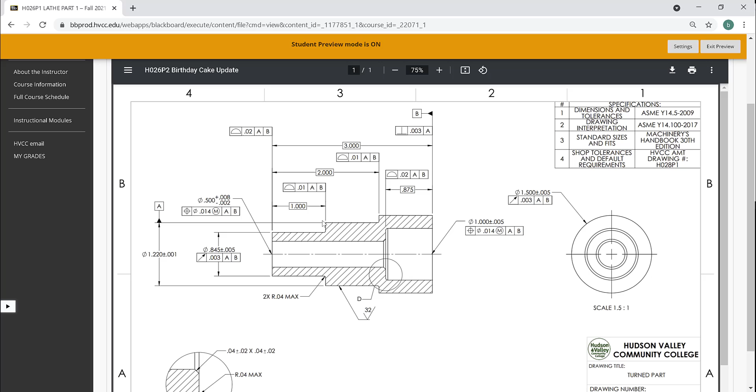Okay, so get back in here and let's take a look at some of the support content, and let's start with the lathe operator handout. Very similar to the mill, except obviously it's for the lathe.

It gets into the index, then types of lathes: ST series, TL series, DS series for dual spindle, chucker lathes, etc. Types of turrets - we have a VDI turret here on our turning center. The other type we have is the 8-station automatic turret, which is only on our CL, or chucker, lathe.

Other than that, we just have the regular dovetail, Aloris style tool posts that you're used to from the manual shop. We'll cover the VDI turret at a later time when we're going to be running that machine, because it's a little different - it has an automatic tool presetter, things like that. So a lot of this stuff we're not going to worry about right now.

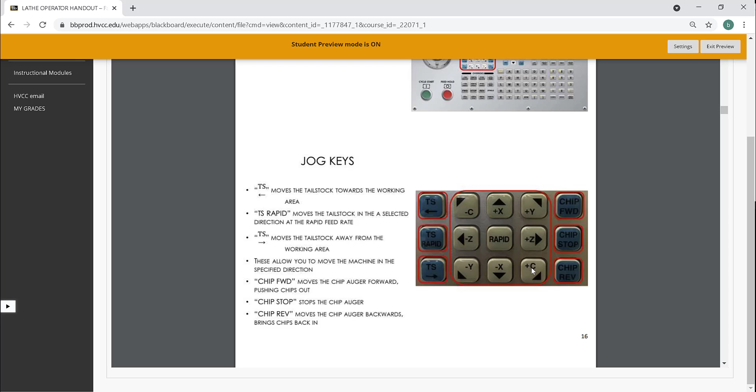It goes over the pendant. It's very similar to the mill, but it has different buttons applicable to the lathe. At least on the machines we're going to run first, there's only 2 axes. All the locations are about the same. The tool offsets are a little different, how you set tools is a little different - we'll talk about that. Overrides are pretty much the same, jogs a little different, same layout but different values. Mode keys are pretty much the same, loading a program is going to be the same. Not a whole lot of differences here that I'm really seeing - it's just more applicable to lathe, what you're going to want to see when running a lathe.

Okay, make sure you keep this, make sure you print it - very important at the machine. It'll get you out of a bind if you're stuck and don't know where something is, in case I'm not available. Position, again, is going to be X and Z. Could have a C axis, could have a Y axis, depending on what machine you're on.

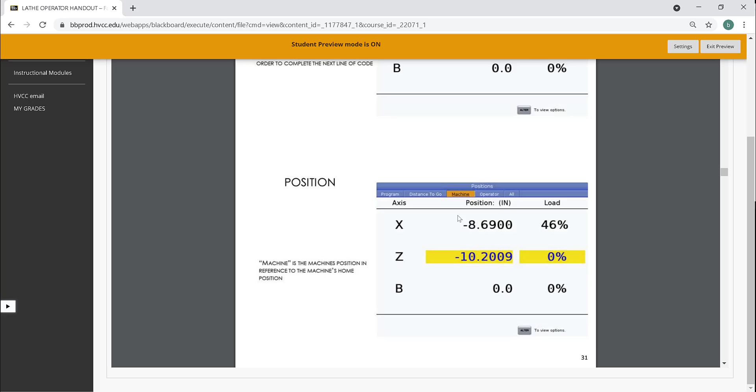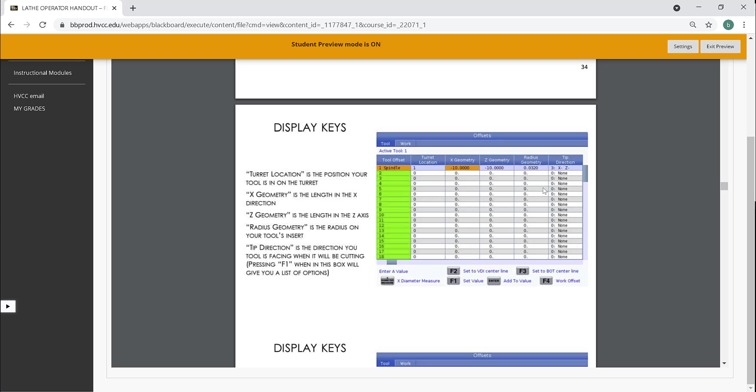Current commands is similar, but that's really about it that I see. Again, you're going to see some differences right underneath the F1 buttons - those are for setting up tools. We'll talk about that in the shop.

Okay, the help menu is pretty much the same. Again, instead of tool length offset and work offset like on the mill, this is Z face measure and X diameter measure - a little different. Types of tooling it gets into: stick tooling, parting, internal work, face turning. These are specific - we're going to use more of the regular stick tooling for now.

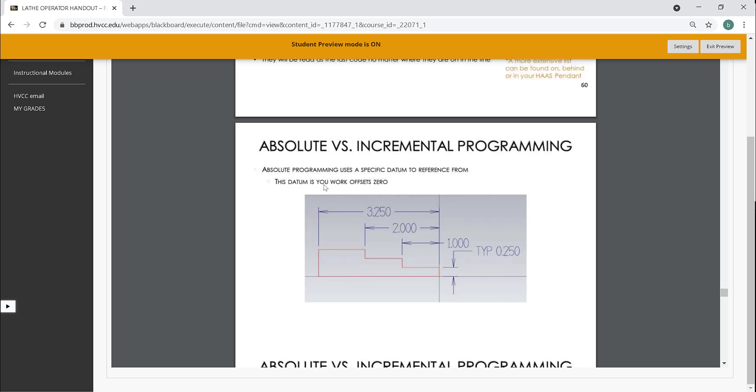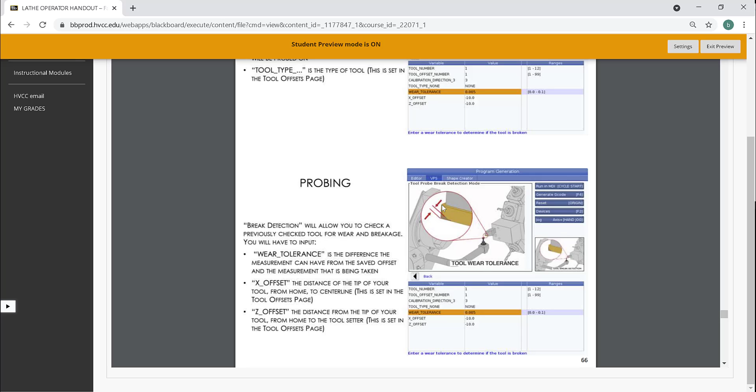And then programming, some of the basics. This goes into a little different changes versus the mill manual - absolutes versus incremental programming, which I'm not going to revisit too much. Then it gets into the VPS, which we are not going to use right now. The VPS for probing is useful when we get to that machine - that's one machine in the shop that has that. We will cover it.

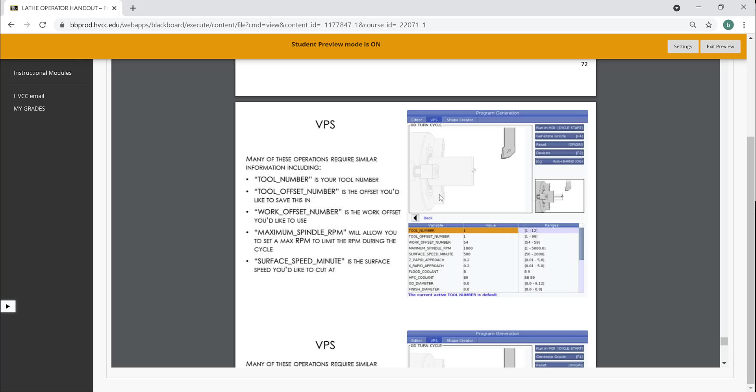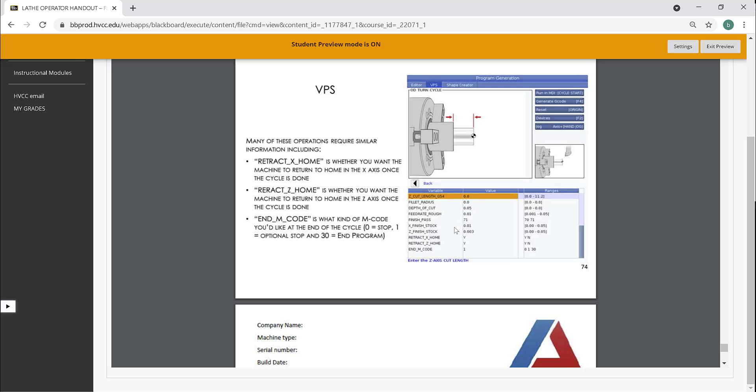The shape creator and other onboard programming, the VPS, we are not going to cover till later on. The reason is that this is going to be HAAS specific, and if there's not a HAAS machine where you go to work, then any skills on this could be a problem. So I'm going to try to teach you ways that are more universal so that you are ready to run almost any machine tool for the most part. We'll get into VPS at a later time after we cover the more universal basics.

Machine maintenance, 15 easy steps for preventative maintenance, very important. Then resources, you can click on this in the link. Okay, so that's the overview of this lathe operator handout.

The lathe programming workbook we'll have open, and what we'll do is go to the whiteboard and talk about some of the basics in programming, some of the basics on the lathe, touching off tools, things like that. You'll see there is a difference in the program format, and that sometimes there's less code, less things you have to worry about.

I find that lathe programming does throw people for a loop because a lot of lathes run on diameter for all their X offsets. And even when you're setting tools off, you see numbers that don't make sense because you're working on diameter in the X.

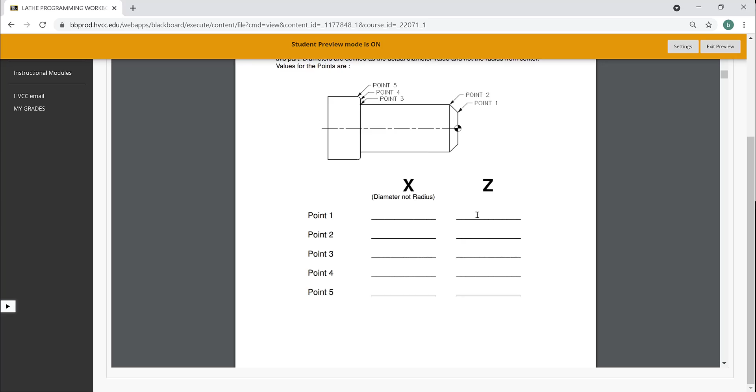So let's take a break here. Go ahead and take a quick look at the workbook, and then I'll come back on the whiteboard and we can discuss some of the basics here.

Alright, so we're on page 5 in the workbook, and I'm taking a look at the setup they have here. You'll see the chuck, the part, and the axes. Essentially, all HAAS lathes, whether the tool comes from this side or this side, you always program it like it's coming from this quadrant to turn a diameter, okay? So that's the way we're going to program.

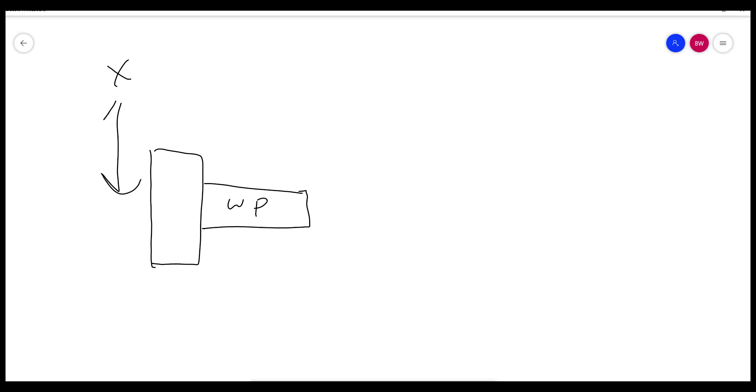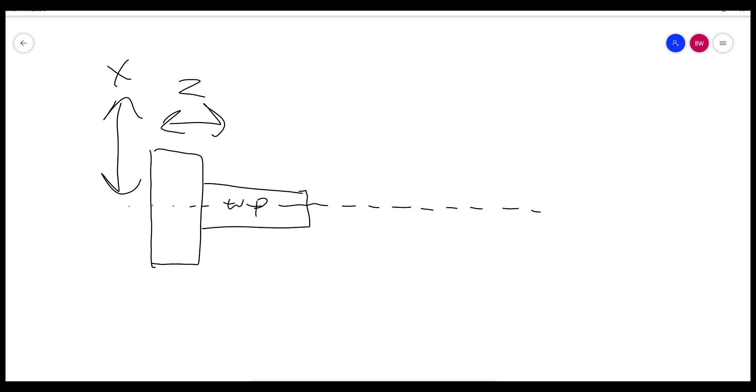Some important things here. The lathe, if this is our chuck, and this is our workpiece, the work offsets work a little bit differently. The X is this direction, the Z is this direction. The work offset, usually you do not need anything in the X because the X is center, 0 is center of the spindle. So X is 0.

In work offset, let's say G54, the Z, normally when using work offsets, would be set to a preset location, let's say the chuck face. Because when using the lathe, if you're not using a presetter, but a tool touch-off probe, a lot of times most people will touch off all of the Z's to here from home.

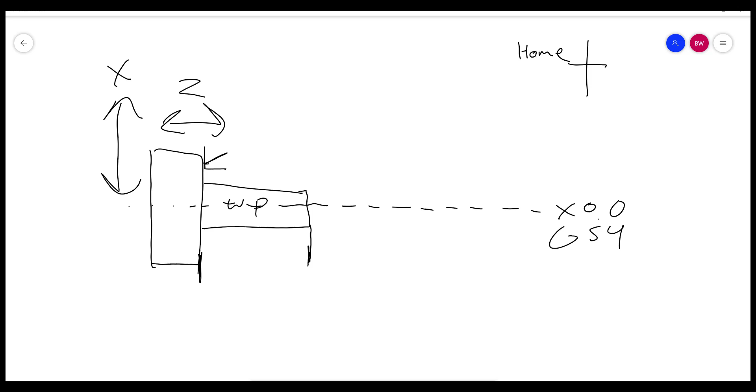And then all of the diameters will touch off a known diameter, and compensate from that diameter to the center, or X0, the center of the spindle.

So some people will touch off the part, take a little cut, measure the diameter, use what's called X diameter measure, and then you'll end up typing in whatever diameter that is, and that'll automatically calculate the swing, or the diameter that the tool will cut when home.

So if the machine is home and the tool is actually sticking out, let's say the tool looks like this, something like that, looks like a hockey stick, but whatever. This diameter, when the machine is home, that this cuts right now, okay, is what's going to be stored in the controller for the X offset.

So you'll see numbers that are 13 inches, 10 inches, whatever it might be. That is because it's checking, it's a diameter right here.

So that matters for all OD turning tools. Now for ID turning tools, it'd be a little different. You would have to have a hole existing and touch off the ID and do X diameter measure to the ID. We'll cover that in a later video.

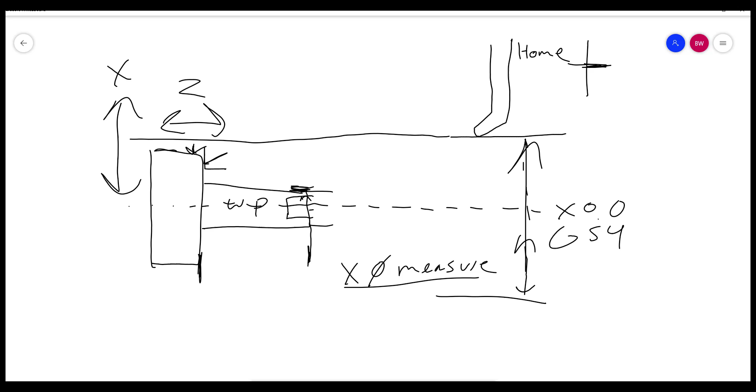Now, like option 1 on the milling machine, you can touch off all the tools. Let me erase some of this a minute. You can touch off all of the tools to the face of the workpiece. Okay? So if this is our workpiece, all of the tools could go from here. All right? Here's again the problem with this. If the workpiece length changes, you have to touch off all the Z's again, or know that distance.

If you touch all the Z's off of the chuck, and then with a taught tool, come off and set your G54 to the face of part, that way your tools are taught the entire time. But it's up to you. The tools will most likely be re-zeroed when you enter the lab. If you're using one workpiece, you're not going to be running others. Then it probably doesn't make a difference.

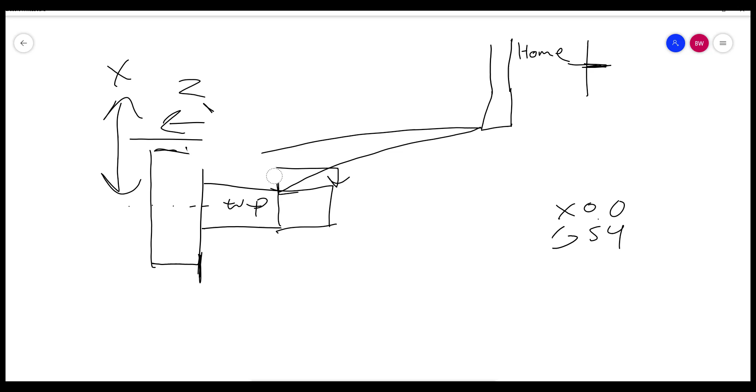You are going to be fine to use the option 1 equivalent on the lathe, which would be to just touch off the tools to the part. Okay? And sometimes if you're doing multiple workpieces, you'll set up a stop from here to here so you can bring the stock out of the chuck to the same spot every time to run another part. So that's up to you.

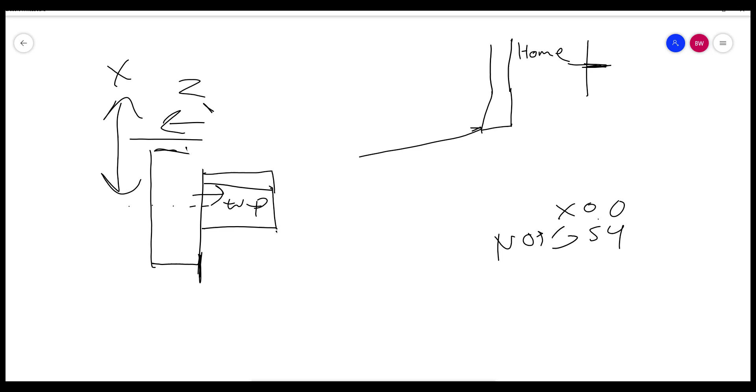So again, just to reiterate, you could have no G54 offsets and touch off every single tool to the workpiece on X equals diameter and the Z face. Okay? That would be equivalent to option 1 on the milling machine. You change the length of the part, you got to touch off all the tools again. If you do it the other way, and this is a good way if it's your machine, you know it's going to be good. Nobody else is messing with it.

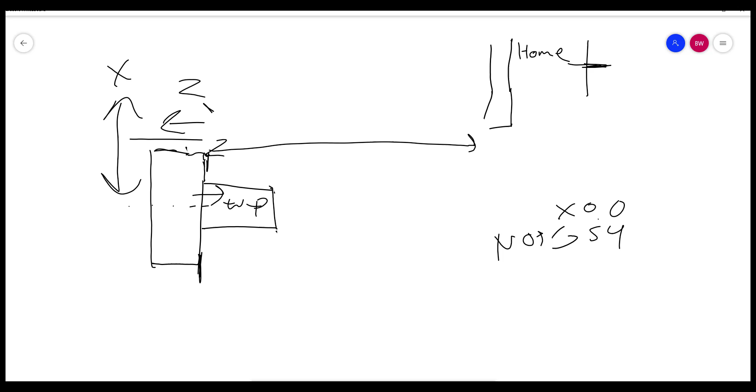If you touch off the tools, especially in the Z, really only the Z, if you touch off all the tools to this face, so this distance, this would be a tool offset. Okay? Then have a G54 offset using this touched tool from here to here. Now the tools are touched, and then all you have to do is change one offset to change, let's say, 10 tools. So it's much faster that way. It's very similar to using the 1, 2, 3 block on the milling machine. Okay? So just remember that.

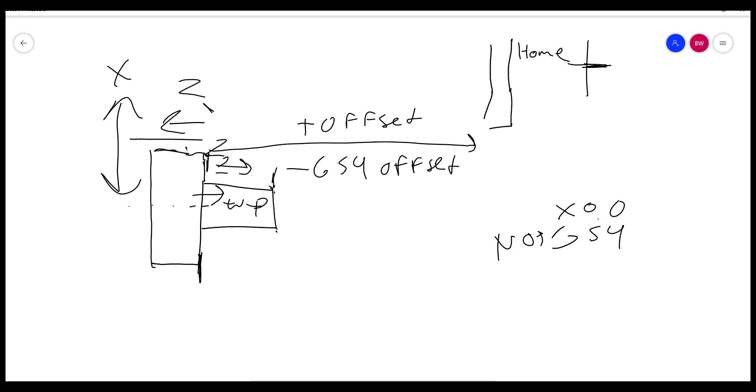So let's look at a couple other things when it comes to this. Let's go through the book here. We're getting incremental and absolute, very similar. On page 8, it gets into a very important thing. Let me clear this. In page 8, it gets into point locations. So the Z is not a big deal. Actually it's 7 and 8. You'll see the part on page 7 and then a little chart on page 8. And then there's also information on page 9 that gets into corner radius locations, and that's really good too, but we'll focus on that later.

Take a look on page 7. You'll see the workpiece, and it gives out diameters of 1.5, 2.0, and then some Z distances. Let me pan over to this. I'll bring this over here, and take a look on this example. Point 1, 2, 3, 4, 5. Okay, diameter, not radius. So one thing to take into account here is that on a chamfer, the diameter created at point 1 is what you need to enter in for point 1.

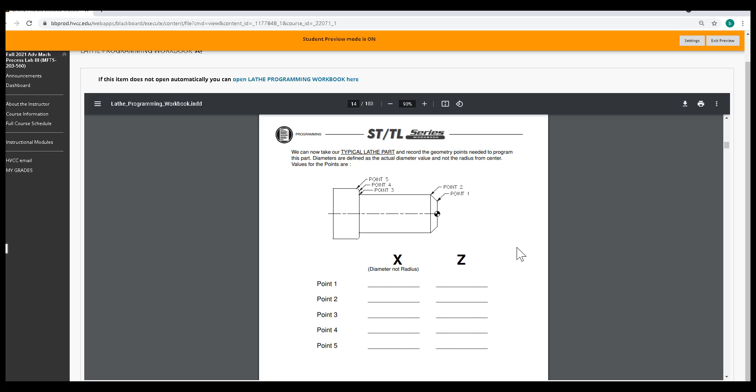So let's go up on the top here. This chamfer is 1/4 inch by 45 degrees. So it's not going to be 1.5 minus 1/4 inch. It's got to be 1/4 inch times 2. It's 45 degrees. Each side of that triangle is the same. So it's going to be 1 inch. Okay? So when you get down into this chart, point 1 is 1 inch on the X. The Z is 0. Point 2, the X is 1.5. The Z would be negative 1/4 inch.

Okay? Now you got to go down to here. If you get to point 3, the X is going to be the same, 1.5. The Z is going to be minus 3 inches.

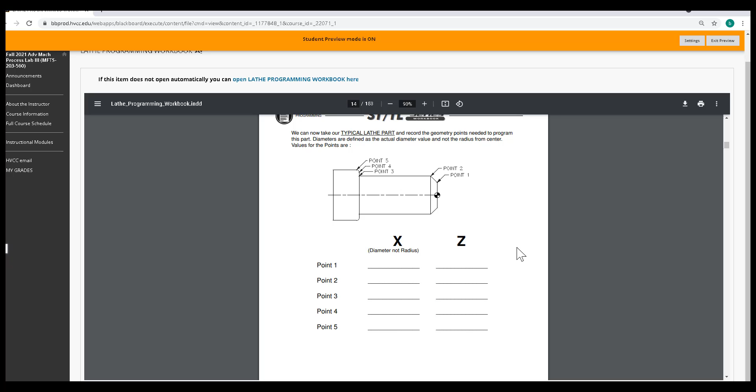When you get to the radius, point 4 is when it gets tricky, because now you have a similar situation we had with the chamfer. You have to subtract 0.2 from 2 inches, or 1.8. And what's really important about that is that's going to be the diameter before the radius. So for point 4, it's going to be 1.8 and then Z minus 3.0.

Then we go up to the next point, which is point 5, and that's going to be X 2.0 Z minus 3.1. So work through that, take a look at it. Just remember that all the X moves are on diameter, every single one.

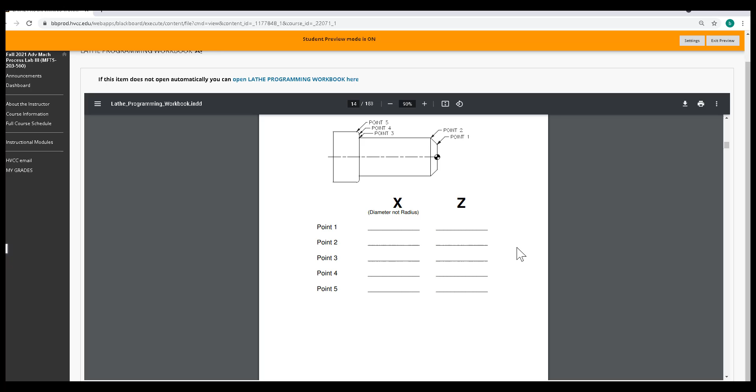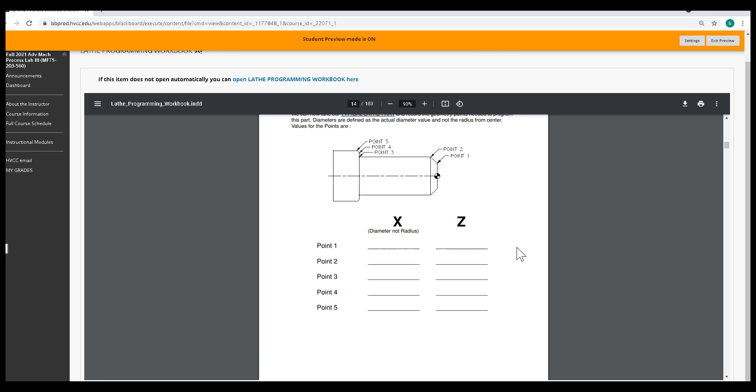We get to the next example. You can work through this if you want now. It doesn't really make a big difference. We did go over a small radius here, but I recommend you work with that. When we get into circular interpolation, we'll get into more details on this.

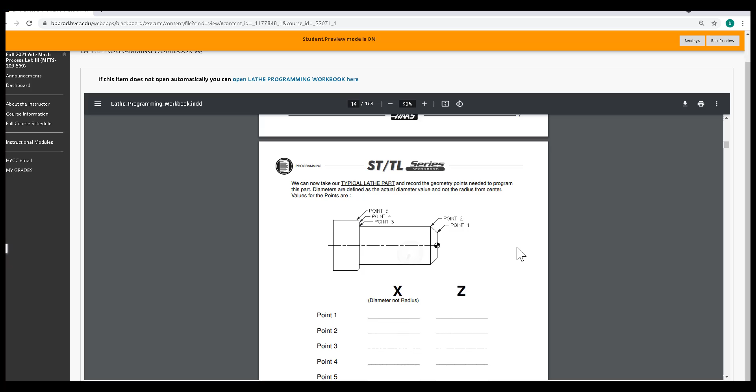So that's fine. And again, it goes through in parentheses. You don't need it again. We went through that with some of these, going from point 2 to point 3. From point 2 to point 3, you don't need another X value because it's already there. It's not going to change. Then we get into programming with codes.

The program format does change, but let's pause here. I recommend you work through these. If you're having an issue, make sure you email me or see me in lab. We'll pause here, let you catch up, and we'll continue.

All right, so we're going to continue taking a look at some other program structure things when it comes to lathe, some of the differences. I'm on page 27 in the workbook, so let's skip ahead and get right into this. My concept here is I do this so that we practice what we need in process without having to really go through the workbook. We will cite it as needed, and I find that really helps back up what you're doing in the lab. So just like milling, we do need to start and end our CNC programs with a % sign.

And you still have the O number, so O and then 20, 21, or whatever you want. Let me clean that up a little bit. Then we get into our first line of code, and you're going to see a lathe, especially from the examples in the text, a little more broken up. We will really have our first exercise with mandatory line numbers when we start using our rough turning subroutine. So let's cover that now.

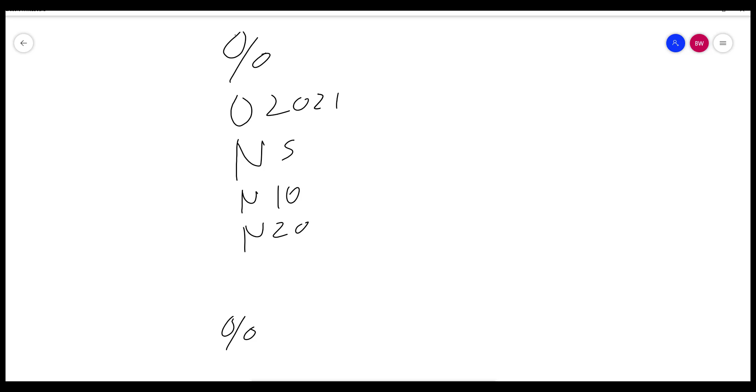I don't remember if that was in the milling, but on some programs you will see an N, like N5, N10, N20, whatever. Those are just line numbers. They are great for editing, but you do not need them necessarily. A lot of these simple programs we're going to be working on, especially on the mill, until we get into subprograms, you don't need them. They are handy. You do need them when turning a little bit. You'll see I use them only as needed because there's extra things you have to type in.

Instead of putting like N1.1, if you need to add it after line N5, you can add N6, N7, N8 easily at the controller. So for right now, we're going to skip that, but I just wanted to mention what the line numbers are. We're going to end up calling up tool 1, and it's going to be T101.

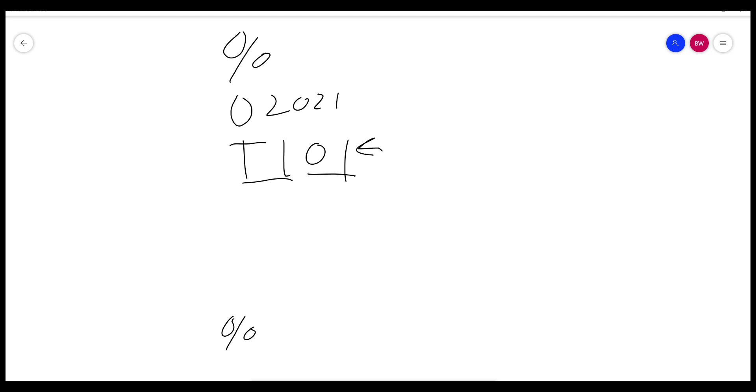The key here with T101 is on the lathe, you need both axes when turning anyway, so you need the X and the Z offset. So you just call up tool 1 using offset 1. And this gets interesting because sometimes you could put tool 1 offset 3, offset 4. This offset takes care of Z and X equally. So that's different. It's no T1 M6, it's just T101.

Now, your next line is going to be something to do with spindle speed. Let's get the spindle turning when the turret's away, when the tool's away, and get the part turning. So the first line, and this order is specific, you really need to have this G50 on first, and we're going to call S, let's say 1000.

And that limits the spindle, or spindle max speed, at 1000 RPM. Because on the lathe, we're going to have what's called constant surface speed. So when turning, especially when facing, you're going to get the same feed rate the whole time, or the same chip load. So as the part gets smaller, the surface speed will automatically be calculated by the X location, and it'll spool up the RPM to keep the surface footage the same. Okay? So you need this limiter.

Okay? And again, we are on page 27 in the text. If you're following along the text, I did skip the N1 and the G28. I'm not really worried about that for right now. Next, we're going to just turn the spindle on. Okay, like I said, G97 turns the spindle on at a fixed RPM.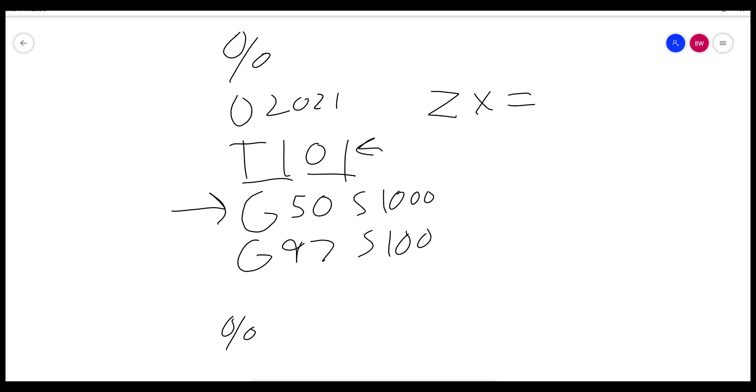G96 turns it on to a constant surface speed, and the interesting thing here is that the S value turns into that constant surface speed, not the RPM. So right now we'll end up putting a G97. Let's say it's S100. Just turn on 100 RPM, get it turning. Okay, and M3. M3 is going to be, if you're looking at the chuck, counterclockwise. It's going to be turning the way to cut correctly.

Usually a lot of these, at least in my experience, you've got to be looking at the back of the machine or from the other side of the chuck, and that would be clockwise, and that's how they derive it. But depending on what machine you're on, especially in live tooling situations, you've got to make sure that thing's spinning the right way before you turn it on, and that can vary by machine, so make sure you double check that.

All right. The next line of code, we're going to have a work offset call out, a rapid line, go to a start position, and then turn the coolant on. I'm just trying to follow along with the text here to keep some sort of continuity. Do you have to do that? No. You could break this up. Do you need the G97 right now? No. You don't necessarily need it. But it is wise to get the spindle turning. You just don't want the thing to spool up to some RPM.

This G54 line here, so it's going to be G54, and you could put that separate if you want to for easy editing. G00, and then you could go to the next line, X, whatever, Z, whatever, and then you could turn coolant on separately if you like, just so it's easier to edit. So the G54 is taken care of, and the offset and what tool is in there is taken care of. The spindle is on.

And then it gets into the constant surface speed, and coincidentally, it does turn on a G71 command, and we'll talk about what that does in a minute. But I think that doing that in the simulator will help. So let's get into the simulator. Let's start getting this code going for our example workpiece, and we'll continue from there. So we'll take a break right now.

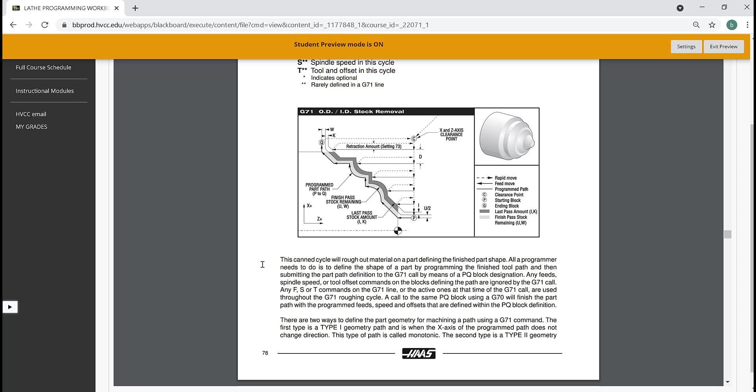Okay, so we're in the simulator. Let's get back to Blackboard quickly. I will give you a page reference right now. We do have to set up the program to face the workpiece and things first, but we will continue on page 78 shortly. So get to that page while we're there. I'll get back into here and take a look at our workpiece.

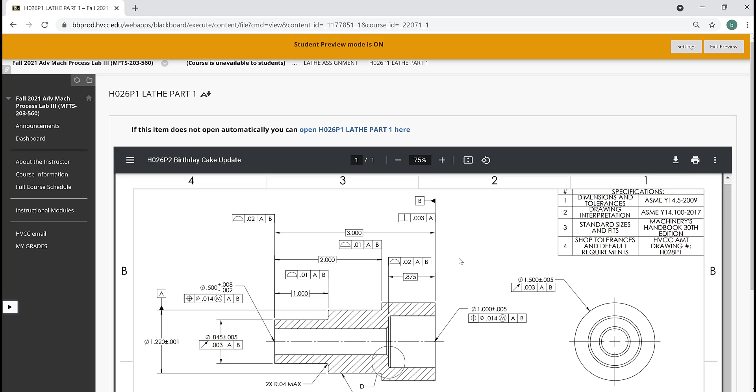All right, so we're going to be working with 2-inch stock for this example. The workpiece max diameter is 1.5, so we do have a little bit of roughing to do. So let's start programming this workpiece. We'll get over into here, and let's start with a % sign. Let's just go T101 and call up tool 1. So we're going to put parentheses over here, tool 1 offset 1, and we can add a comment right below here if we want.

Our O number is obviously needed, O2021, or whatever you like. And then comments are also fine.

Lathe example. So we've got tool 1, offset 1, that's loaded. A couple things you could put here. Even before turning the spindle on, you could add G99, which forces the lathe to inches per rev, which is handy. That's in the text, so take a look at that. That's fine.

There's some codes, G18 forces the XZ plane. They default to that, so I wouldn't really worry about it for right now. We can put G99 in just to be safe. We could do G40, G80, those are things you could cancel, but a lot of modern machines cancel them automatically, or you already did. So I wouldn't really worry about it for right now.

We'll try to get these programs as tight as possible so they're easier to edit. So let's get our spindle turning. That's going to be G97. Let's do S, say it's at 200 RPM. That's fine for now.

But again, before this, you must put your limiter, G50, S, and we're going to limit it to 1000 just to be safe. In parentheses over here, let's put IPR. And right below it, for our limiter, RPM limited to 1000. And then we have our straight RPM callout.

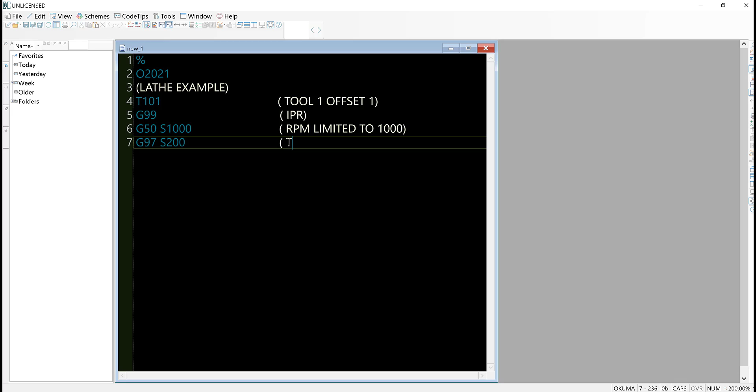So it's going to be turn spindle on to 200 RPM. And we are missing one code here, which is going to be our M3. So now our spindle's running.

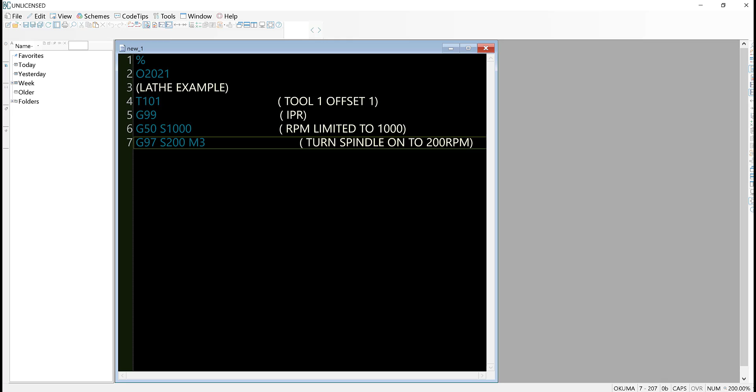Now it's wise to start getting some movement going. We don't want to turn constant surface speed on with G96 until we're close to the workpiece diameter, and where we put this is going to be critical. So I'm going to put my G54. I'm going to keep it separate.

I'm going to end up putting my M8 here. You don't have to, it's probably not necessary. It depends on if there's a delay to your coolant. If there is, you want to put it on a little bit earlier as the machine's moving, but for us it should be pretty instantaneous. We could even put a dwell there, it's not a big deal. But I've run into some machines where a check valve is damaged and it takes a while for the coolant to turn on, so just something to be wary of.

Okay, so we got a work offset. We'll put G54 and G00 just to be safe. And then we'll go to X2.1, Z.1. Our stock is 2 inches in diameter, and we want to be 100 thou away on the face. Not a bad way to go. The other option is it's not critical at this point.

We can go to X2.1 and then separately go to Z.1. The point here is it'll move in the X, then go in the Z. You could do the Z first, then the X. Whatever you need to do to make sure you don't crash into the workpiece. So it's up to you how you want to do that. You've got to watch out for your centers, tail stocks, and things. It's up to you, either way will work.

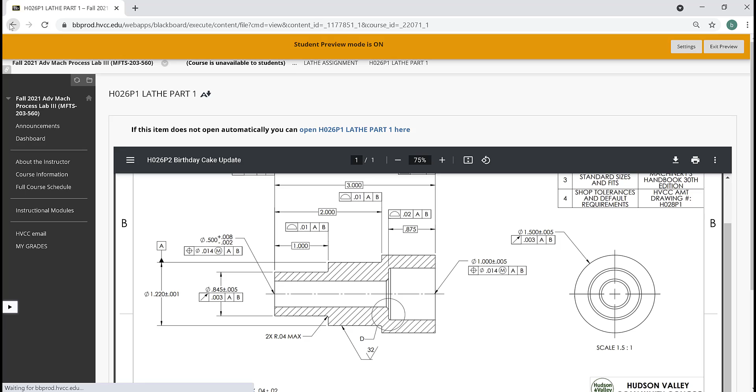Let's take a look here and cite this properly. If we get back into our support content, into our lathe programming handbook, I'll go down and look for this.

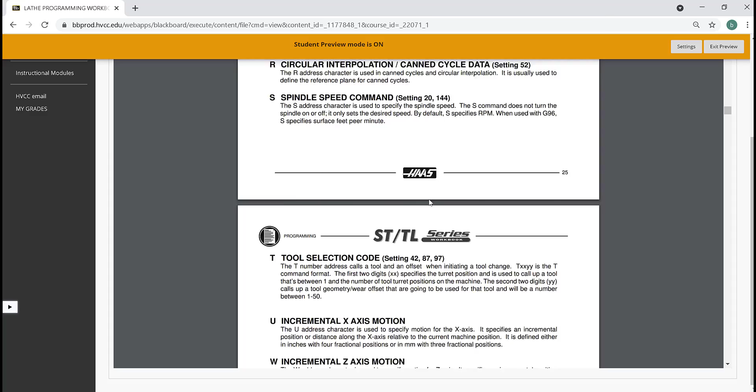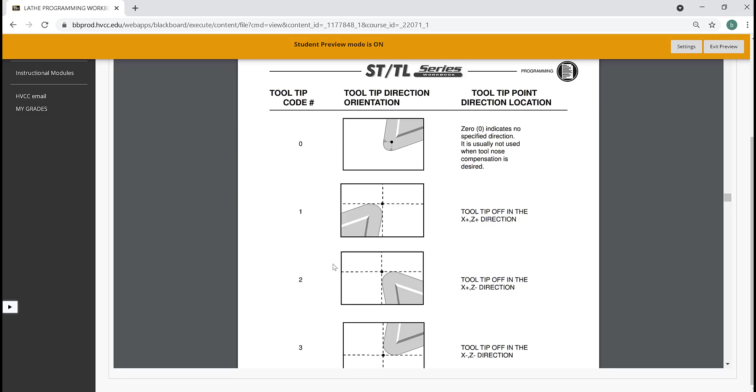G71 is a very useful toolpath, or subroutine. I know the manual goes over tool nose radius compensation first, but our example does not lend itself to cutter comp on the lathe. We'll cover that when we cover cutter comp on the mill, which will be the next module - it's important to cover them at the same time. We are not cutting any chamfers on this workpiece, so it's okay to just ignore it for now.

We'll get back into here, and again, I'm scanning. We start turning page 77, and it goes through the different cycles.

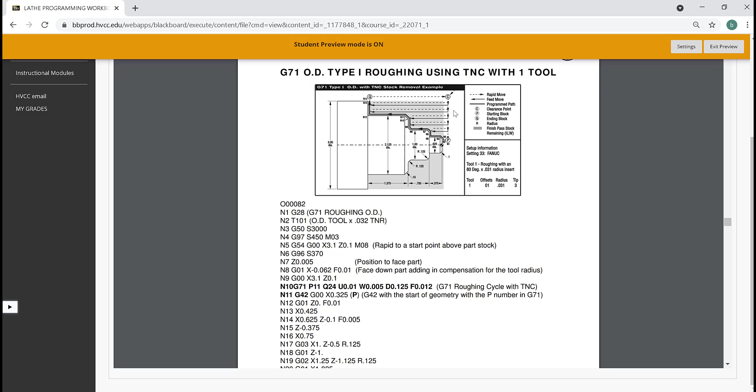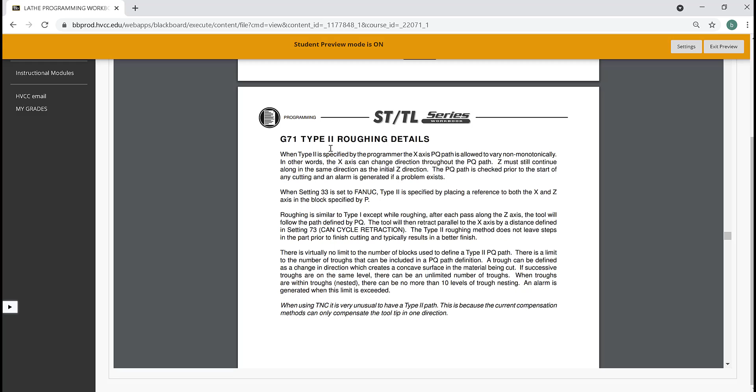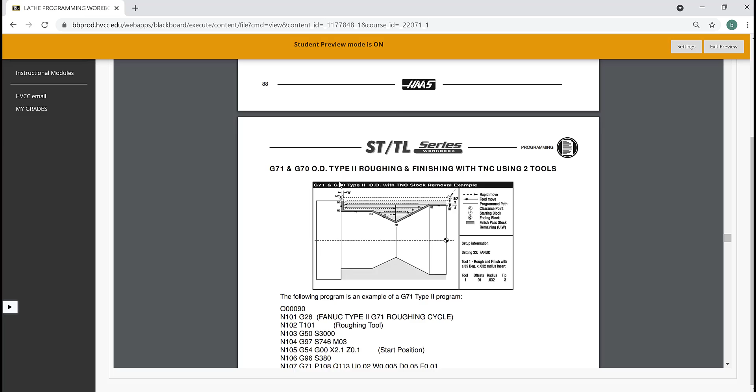We will be using G71 and G70. On page 78, we get into the parameters for G71, and then it gets into whether it's type 1 or type 2. Type 1 cuts just like this: cut, come back, cut, come back, cut, come back. Type 2, which I don't use a lot, gets into here on page 88. We'll go over how the machine knows the difference, and then you'll see that you can rough out different contours like this. G71 would not do this well - it's meant to just cut in, sort of like a simple roughing cycle. It's perfect for the part we're working on.

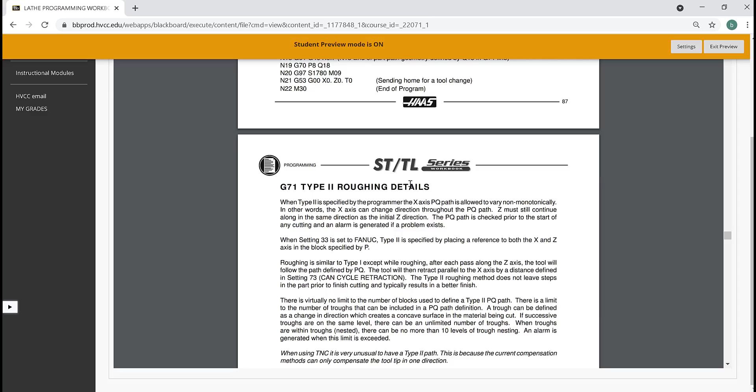It gets into with tool nose radius comp. You do need that on some of these examples, but for right now, let's keep it real simple. I won't even cover type 2. I want to focus on type 1, how to call up type 1, and how to use type 1.

So we'll go back up to the top here, and I guarantee I really want you to read this - you'll understand it. Let's focus on type 1. So you're seeing this, our example.

We did face the workpiece. It has some examples here - face the workpiece, it does face it. They go down 60 thousandths. That's fine, I don't like to go down too far because it ends up rubbing the workpiece - you get yourself out of the way. They do it in one line; I don't like to do that because you have an issue. Then I don't like vectoring, which means moving two axes at once. If I can avoid it, I will sometimes, but I find that you can crash easier that way. But once you get comfortable, it is up to you.

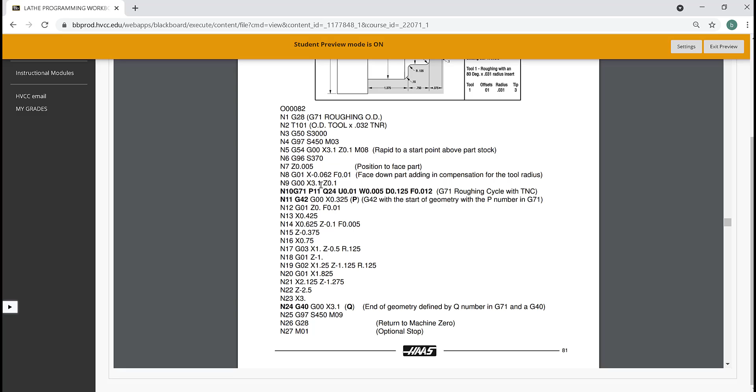After this, we will start our G71, and I'm not going to put any values in yet. I'm going to start below the G71, and I'm going to put N10, which is going to be the first line of our cutting. Between P and Q in the G71 cycle, you'll see a P value and a Q value - that is the beginning and ending of the contour you want to cut or rough out. So N10 in our case is going to be P10.

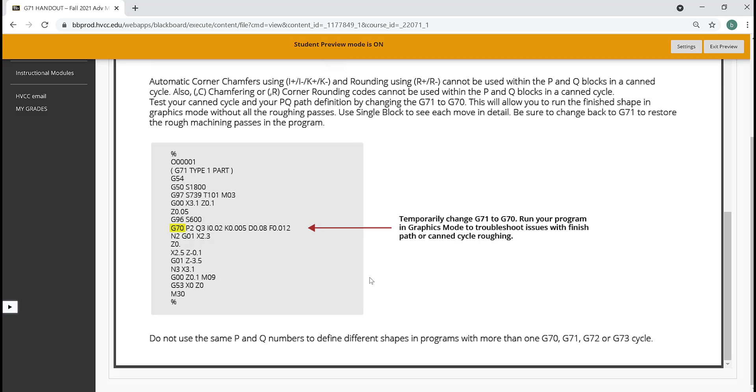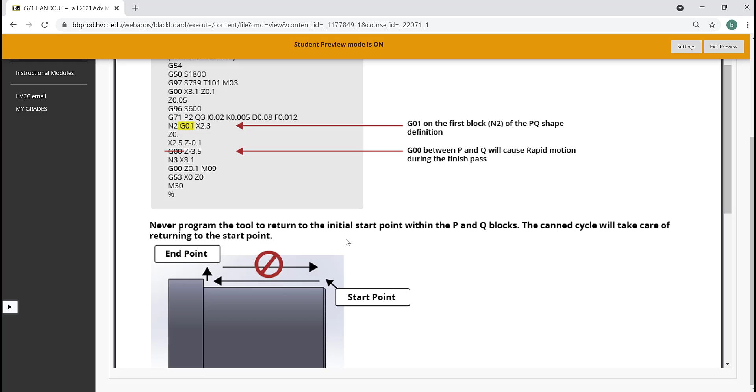I want to go over and open up, and I'll go back here - I want you to see this. Go to your G71 handout and the support content handouts and take a look at this quick reference sheet, which is very handy. It goes through a couple instances here, and you'll see on their line you have G71, P2 to Q3 - they have N2 to N3, first and start. We'll get into the other values in a minute, but take notice here about what it says on your first line: it says G01 on the first block with the PQ shape, because if you use G00 between the P and Q, it will cause rapid motion during the finish pass. So this is going to rough out a shape, take a finish pass, leaving how much you specify in the I and K, and then you can go back with G70 and actually finish it. So I just wanted to reference this - make sure you check it out here. This is the G71 handout, the quick reference handout from HAAS.

So back over here, we'll put a G1, and let's look at our drawing. We'll get back into the lathe module and go to the HO26P1 part. On our initial G71 line, right now we are currently at Z.1 and X 2.0. This line needs to go to X 0.845, if my memory serves me right, and that's going to be this diameter here. Once you go there, the next line is going to go to Z minus 1.0. We're going to have an X value of X 1.22. Then we'll go Z minus 2 inches.

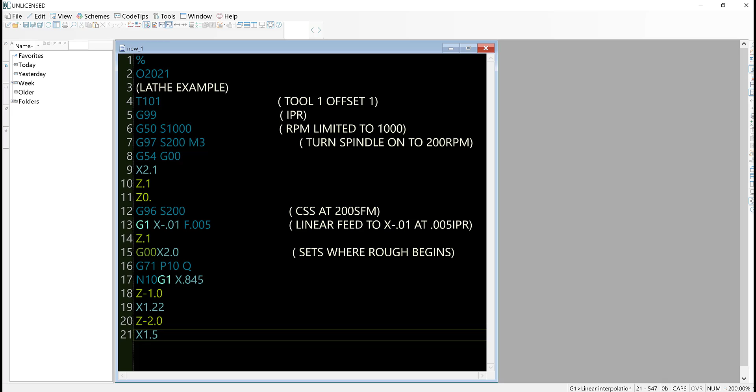Then we'll go to X 1.5, and we'll double check that number, the bigger diameter. That's going back 3 inches, but we need to go past that. That's very important, so X 1.5 is fine. Then we know Z minus 3.25 is good. That'll give us room for our parting tool to come in later, so we're not cutting unnecessary material.

Now, after we get to the Z 3.25, it is wise to bring the X to 2.0. It tells us the end of the contour because we don't want it to be ragged. And then we can put our N20 X.

And you got an option here. We're not using comp, okay?

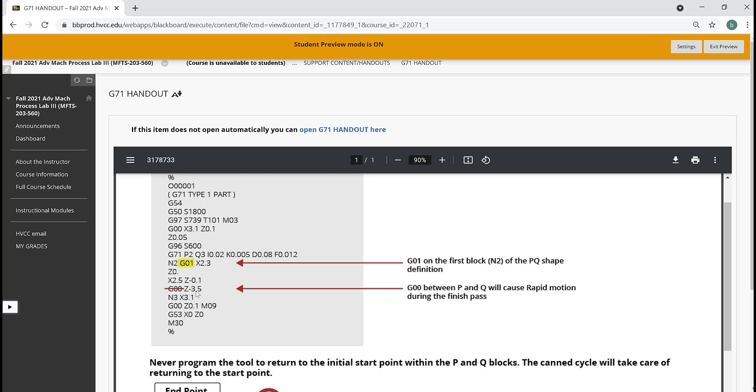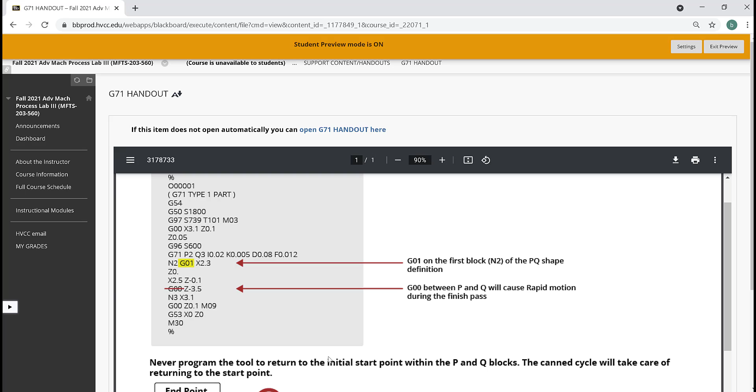So if we get back into here and just look at this example, I'm just going to this one because it's a real quick way to get to it. This G71 handout I find helpful. You'll see that there is no comp on this, they end up going to the X 3.1, which is where it starts. That's fine, but you have to be careful when you have comp on. Some of the values change, some of the things change, so just take that into account. Don't worry about it for now, but just know that we might mess with that later.

So get back into here, and the X 2.0 we will cut and paste on the N20 line. Now Q is going to be Q20. And now we're ready to send the tool home, things like that.

But for right now, before we finish this G71 line, I want to pause, catch up with the profile of the workpiece, and we'll come back here and take a look at what some of these values are, and then finish up the end of this roughing cycle.

So on page 78 in the workbook, it gives you the parameters, whether they're necessary or not, in the G71. We have the P and Q, the starting ending block requirements, and we will need a feed rate. Beyond that, we're going to add a depth of cut for each pass. Then we're also going to add a U and W, so finish stock remaining, and with direction, we'll talk about that when we go to boring.

We're going to be positive for this. It's a diameter value. And then we're going to do a W, finish stock remaining with direction, and Z-axis value.

So let's get back into our program here. We got to add a U value. Now the U is how much you're leaving on the X on diameter. So if you want to leave 5 thou aside, you got to go 10 thou. Okay, get rid of the space here.

In the Z, we'll go W, let's leave 5 thou there, 0.005. That way it's 5 thou overall, 5 thou on the walls, 5 thou aside, because again, U is on diameter, right there. X-axis diameter value, so important.

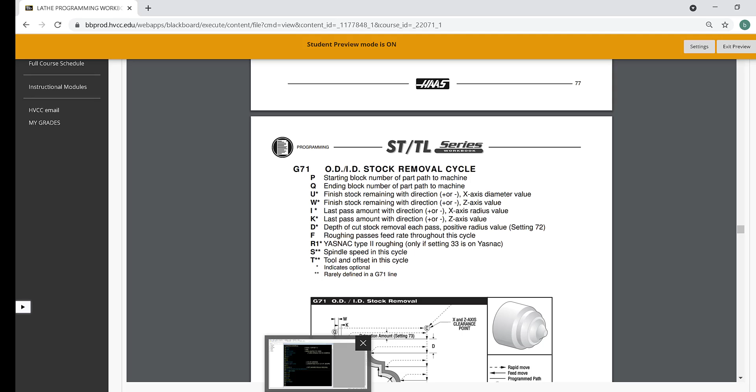Then we'll do a feed rate. We're not going to worry about calculating it right now. When you get to the machine, you're going to be limited on the RPM. I'm going to cap you at 1,000, so you got to take that into account when you go to roughing. We're not running optimal at all. I know I said that before, but just realize that when we go to feed 8 thou per rev, that's fine. It's not very aggressive, but when learning, this will be your first time on a CNC lathe, this is perfect. So this should be good.

Okay, we have our N20. And then after this, we have some options. We are going to go and finish this using G70, but we're just going to use a different tool to practice tool changes. So right now, we just finished our cycle.

Okay, and I'm going to get the tool out of the way. So I'm going to go to X, let's say 3.0, and Z 1.0. Get the tool out of the way, and I'll make sure I'm rapiding on this move. The other thing is right now the spindle is still going to have constant surface speed on, so it's going to spool with that, and that's okay. I guess there could be a time disadvantage there, but in theory you could turn off the spindle. That's up to you.

That's totally up to you. You could just turn it to a G97 S500, just let it coast at 500 RPM, get the spindle away. That way it's not going to slow down, or this turns off the G96. You'll see when you do that, whether you add that or not, you'll see what happens. It's sort of irrelevant, but just so you know, if you wanted to eliminate the variable, that's at 500 RPM. The only thing that should be moving is the X and Z.

No spindle speed change, this is correct. You could just turn the spindle off, it's up to you. So after we rapid it out of the way, I'm going to turn the spindle off. I'm going to turn the coolant off, and you can change the order of that too.

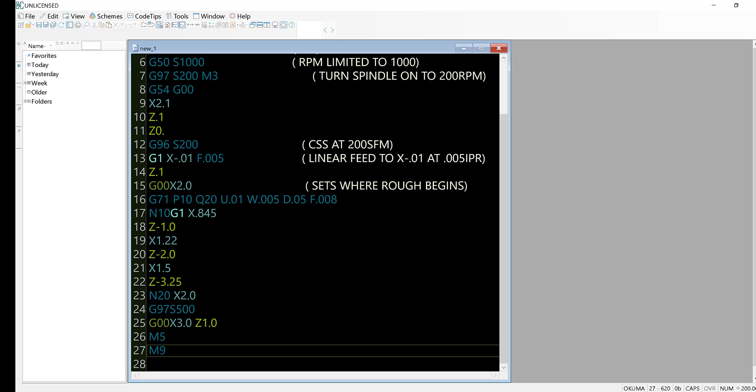Now that we got that done, I'm going to clear the offsets. So I am at T100, so it's T1, no offset. You've got to look at 2 separate spots. So clear the offset - not a bad idea.

Now we can set it for a tool change. You could send it home, it's not a bad idea. G53, X Z0 point, or X 0 point, Z 0 point, no vector back. Then we can go to T202. So now we just change tools.

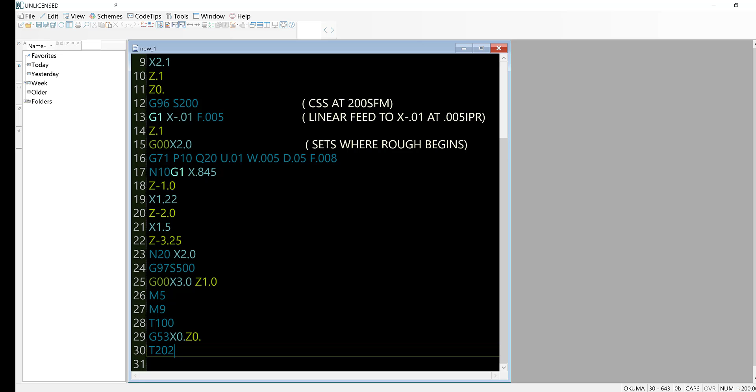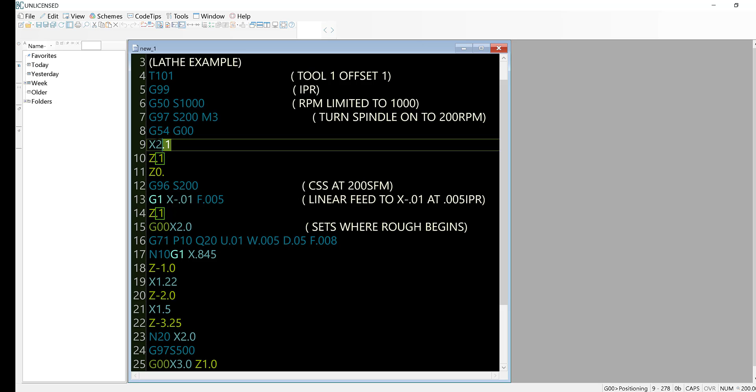So now we can copy and paste a little bit. What I recommend we do is copy and paste, not the facing, but let's just get this area out of the way. So we'll copy this, which is just pre-staging our tool, and paste here. And now we have our G99, our surface footage information, which would change for finishing, so just keep that in mind. And I'm going to change the X to X 2.0, because all that material is gone now.

Next thing I'm going to do is, now you could do a fixed feed rate, but it is wise to use constant surface speed. So we already have our G50. After this X 2.0, we could turn our G96 S200 on, and that's fine.

Now as far as coolant is concerned, if I remember in here, we did not have a coolant turn on. I talked about it, that's up to you. I don't see the M8 anywhere in here. Get into here, and you could turn it on before here. You could turn it on right after the spindle's on. You could probably turn it on right in this first move.

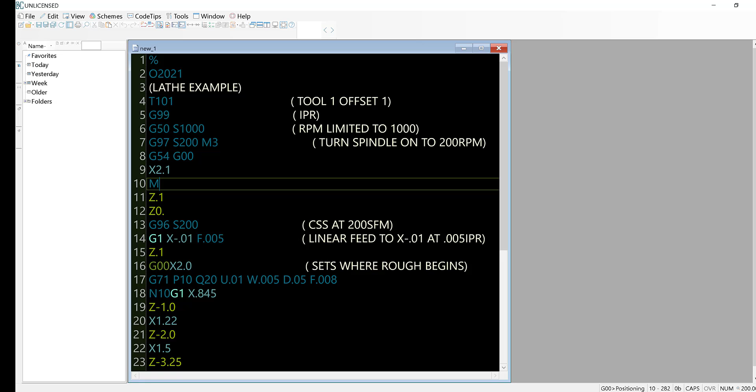So right after the X 2.1, you can go M8, turn the coolant on. That's up to you, again I talked about earlier - talks about the delay and the coolant. It's up to you, depends on what machine you're on.

Everything looks good there, M9, I turned it off. In here again, going to the X2 move, I'll just turn the coolant on. And now we could take care of the Z movement as well, so we'll just go to Z.1, just to keep some continuity from before. Got our constant surface speed on now, so that's going to be running at a surface speed at X 2.0.

And then we can take care of our finishing. So G70 is the finishing cycle, and all it's going to look for is a P value of the contour from before, so P10 and Q20. So all this is repeating this contour.

Now, what about the feed rate? What we need to do is type in a feed rate, feed 0.003, let's say, right here on the first line, because this will be read during a G70, but overridden during a G71. Okay, so we got that there.

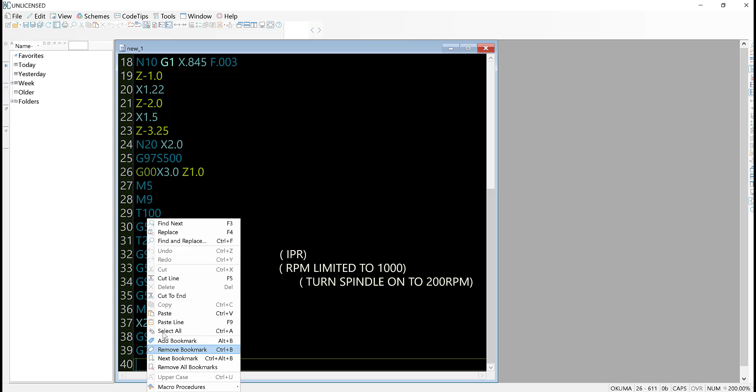So we got T202, IPR, limit the RPM to 1,000, turn the spindle on 200, call up your work offset, rapid, turn the coolant on, bring it over to a position, X 2.0, Z.1, and again you could break that up and move the coolant depending on if you're worried about hitting anything. That's fine. And after the G70, we have finished the workpiece. So it's not a bad idea to get up into here and use the same commands as we did after the G71 is done. So we can right-click, copy, right-click, paste, and we'll do T200 for clearing.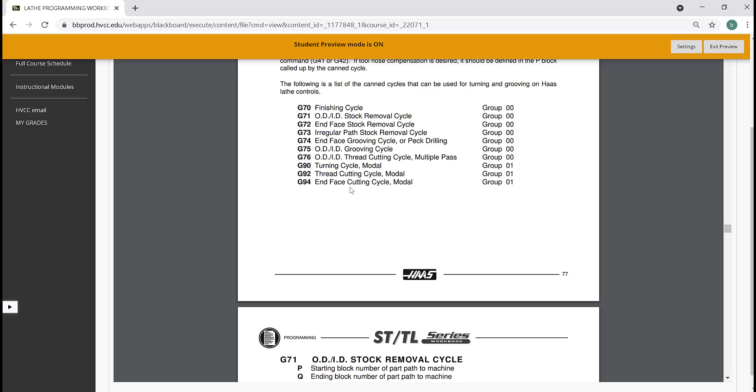Spindle's off, we're good, and we can end the program with an M30. Okay, just for a reference, I want to get in here and get into the G70 information, just for a text reference, in case you're wondering. G70 starts on page 82, and it gets into here on what it's all about. The example is right here.

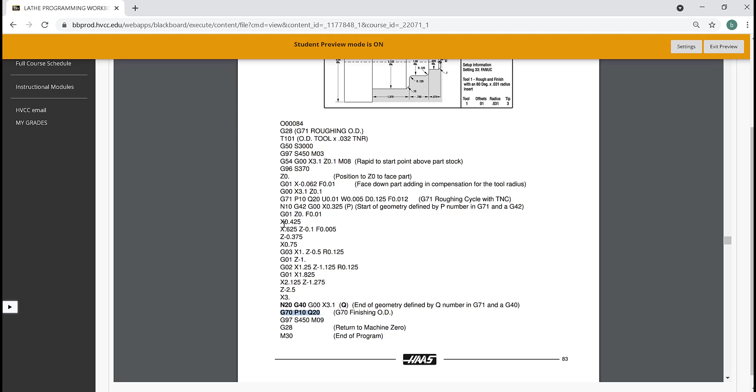Look at the example, and you'll notice we did something very similar. They are using cutter comp, so take that into account. Just be wary, we're not doing that quite yet. Our example does not have any radii or angles where you need tool nose compensation, radius compensation. Okay? So that is really it when it comes to this program of our workpiece.

So let's backplot this, or let's look at it in Verify, or plot with full viewer. Click here, and you'll see we have a profile. Mine defaulted to lathe. I'm just curious what yours will do, but just click lathe here, and we should be good. The readouts on the bottom here are going to read X in XY coordinates, not on diameter. So take that into account. But everything looks pretty good. I don't see any issues right now, at least.

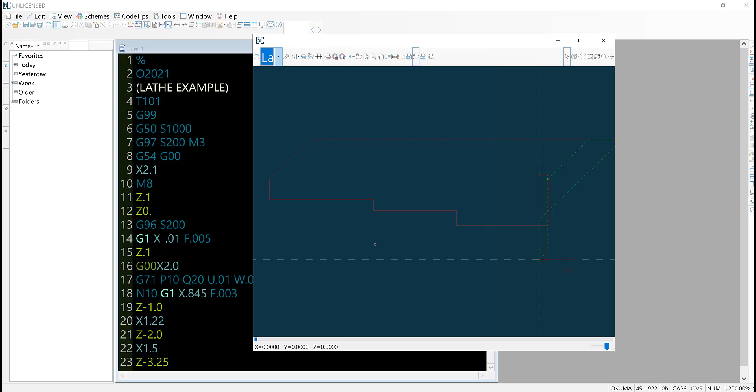So let's take a look at this on the HAAS machine. Backplot's good for getting the bulk of your contour done, but we have to use a simulator for this. Okay? So what I'm going to do now is save this program, which I already covered on milling. I'm going to save it and load it in the simulator, and I'll come back in a minute, and we'll have the simulator open, load the program, and take a look at it on the actual machine. All right, so here's our program up on the simulator.

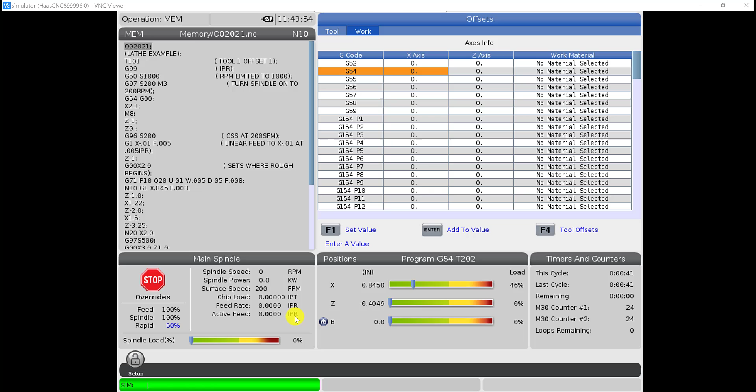It's a little different. You'll see if we go to the offset page here, a little different than the mill. You'll see XZ geometry, tip direction. If we go to the other set of offsets for work offset, a little different, only X and Z. We have nothing there. We're using all tool length offset for this example. But if I get into edit, you'll see our program. And then if I get into memory, graphics, I can run it, and you'll see the program.

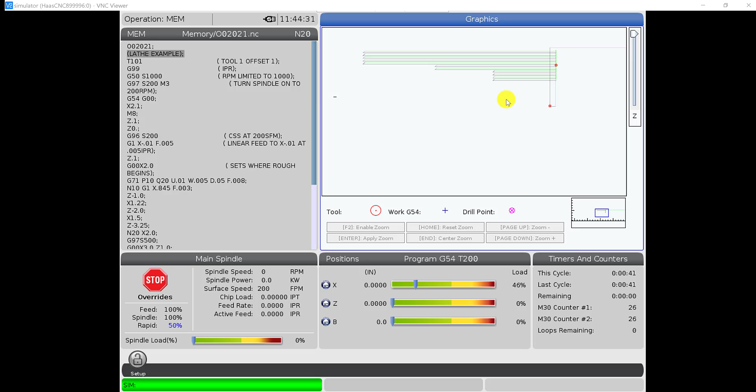Okay. I wouldn't really worry about these green lines for now. Keep an eye on it, but don't worry about that. Sometimes it depends on where you are when the program starts and things like that. It looks good. If we F2 and zoom on this, you'll see what it's actually doing. It's roughing the workpiece. So if I hit cycle start, okay, there it is.

Okay, so let's change some things here. Notice it's roughing, and where the roughing start point is. So down here on the program, we did X 2.0, which I said sets where roughing begins. Let's change that to X 3.0, alter. I'm going to hit memory, go to graphics, and run it again. If I go to F2, zoom out, and run it, you'll see that changes how much it's roughing. So it's pretty easy to change stock sizes, and that's how you control the material between the contour and that initial start point.

That's a good example of that. I'm going to return that to normal. So X 2.0, alter, and memory to save it. And then get back into edit, and let's see what else we have here.

Everything looks good. One thing I talked about earlier, I think I put a note on it, is the G1 on this line. I know the one cheat sheet says to leave it. That's fine. The issue is when you go to finish, it's going to use that feed rate to work down the face of the workpiece and then start cutting in Z minus. So it could be a bit of a waste of time. It's not bad for learning because it does slow it down, but you can put this to G00, and then this last line, this Z minus 1.0, you could turn that to a G1. Okay, so that's normal.

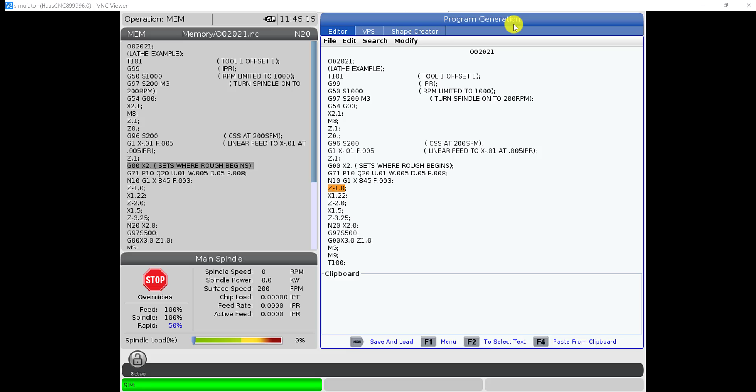You can even look at some of the examples. Actually, I'll scan back in there right now in lathe programming and look at a quick example of that. Let's see where we're at. It's grooving. Let's look at where we're at here.

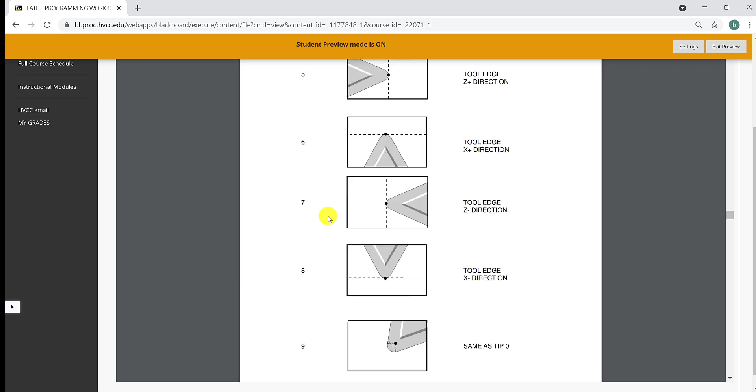There they are. And here is our example. So take a look. We're looking at line N10, which is our first line. They are using comp, so ignore G42, but they have a rapid. Then the next line, going to Z0, they have a G1. Okay, so it is a G1 before it gets into anything else, or a cutting feed rate.

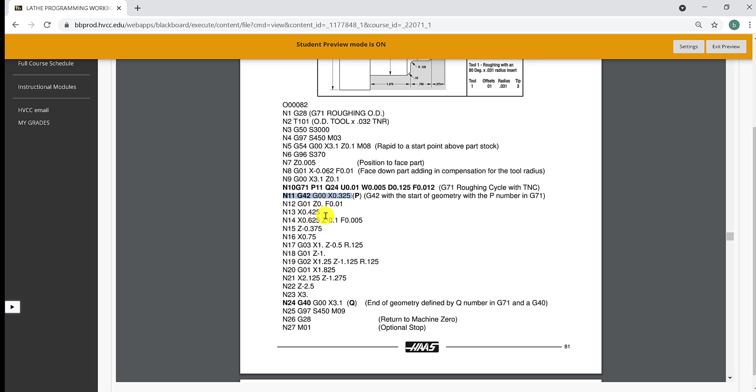You don't want G00 on and not change it, because G00 is modal, and that's going to remain on, and you're going to run into issues. Okay? Alright, so here's another example down here on page 83. You'll see the full canned cycle. Alright? And there is the G1 going to Z0. Not a bad idea. It goes to Z0. That is still technically not really touching to make sure the G1 is on, and this is really the contour.

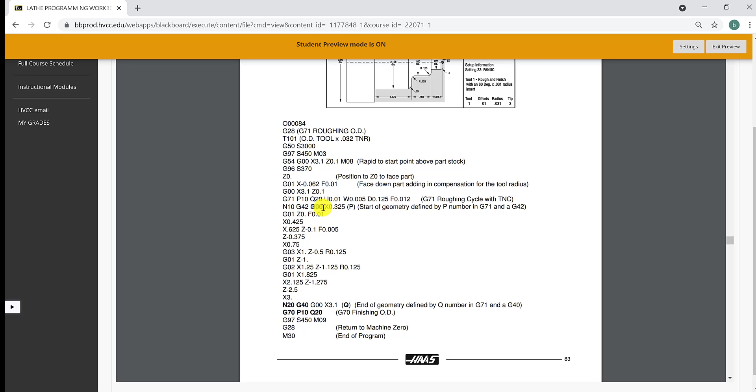While this line of code is not only turning tool nose radius compensation on, which I know we haven't talked about, but it's also rapiding and going to the diameter we want, at least on their example here. Okay? Not a bad way to do it. You could just go in and do Z minus. We could just put G00 in ours, but for now, G01 is fine because it does slow it down and it'll help avoid crashes at the machine.

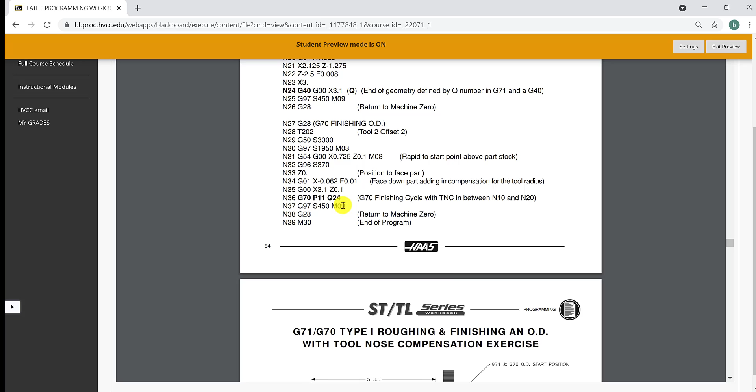Okay. Other thing is when it comes to finishing, the finish feed rate is here, not here. So let's look at our program. So if we have our program, we could actually run this. So if I go to edit mem program and reset actually, and I go to run this, I want you to focus right here and right down here. So if I run this program,

alright, it's going to face the workpiece, and you'll see our 5 thou feed rate, and right now it's facing, and you'll see the spindle speed turn up. It's going to spool up, but it's going to be limited by G50, and you'll see it's facing, coming down the workpiece, going to 0, and the surface speed is 200, 5 thou feed rate right there. That's 200, and it's going to cap it, and it's going to be under 1,000 because the spindle's limited at 1,000 RPM, but that's what it works out to be.

What else we got here? It looks good. Now we're in the G71. Alright, and we are cutting. And we are cutting at 8 thou per rev, which is right here, which is what I want to show you. Okay? So the simulator is not just for graphing, you can actually watch it run. So we're at 8 thou per rev. So instead of watching this whole thing rough, I'm going to hit reset. I'm going to start mid-program at the T202.

Okay? And we'll run this, and I want you to take notice. I actually will single block this just in case. I want you to take a look at the feed rate. So we got the G97, all that stuff turns on. M8, it's going to that position. And then it's going to have the G70. And it will run. But it's going to run at 3 thou per rev. So I'll turn single block off and watch it run. So see where it pulls that feed rate from? So that's your finish feed rate, not the 8. So that's how that works. Okay.

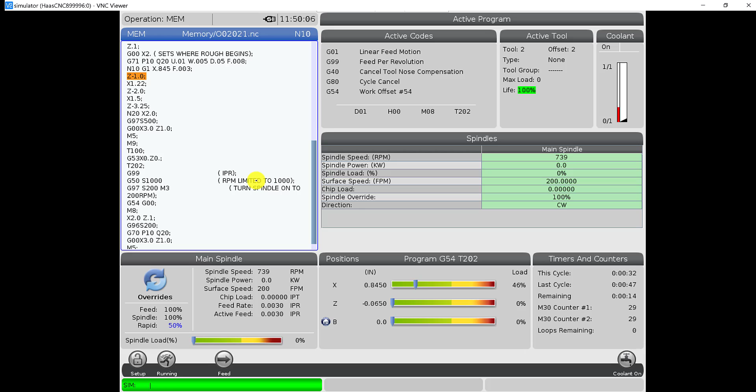So that's really it. I'm taking a look here if there's anything. I mean, this tells you a little direction here, the chip load. Don't worry about that for now. This is more when you get to the machine. So this is what you're going to see at the machine. Tool 2, offset 2, coolant is on. If I remember correctly, if I hit reset and get to edit and just go end of program, I have the coolant off. But beyond that, if I just graph it, that's what we want. Hit reset and we're good.

And we're good to go. So that should be good. I don't see any real major issues here. That's what we're trying to do, is achieve this, and then we'll take it out of the machine and we'll part it off in another lecture. So that's it for this one.